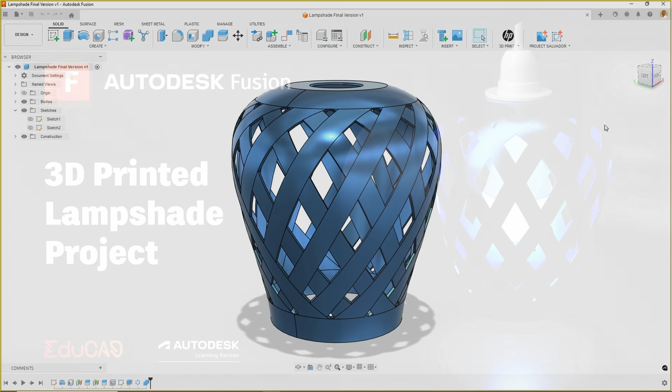Welcome to this video where we're going to use Fusion to create a lampshade that can be 3D printed. I'm Steve Cox, an Autodesk certified instructor, and today we're going to go through building this lampshade model in a way that is robust and resilient to being modified in multiple ways.

You can then use that initial design created in this video in a way that enables design exploration and allows you to use Fusion together with your own creativity to produce your own bespoke 3D printed lampshade.

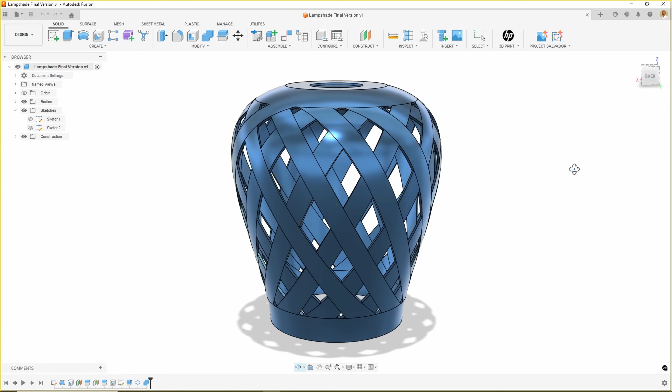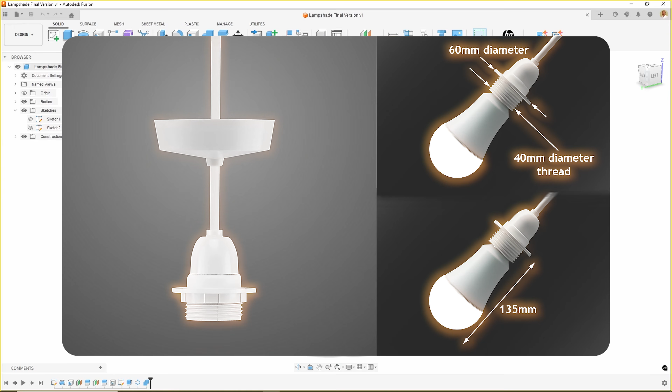Firstly though, I need to understand the light bulb and ceiling pendant that will be used together with this lampshade. I found this combination at a hardware store, and these are the dimensions that I will need to consider in designing the lampshade. But you can make your design match whatever parts you have available to you.

When you start a new design in Fusion and you encounter this intent-driven design panel, you're being asked to choose what kind of design you're about to create. Since the lampshade I'm designing will be a standalone model, I could select the part design option here. However, because I'm going to be doing some exploration with this design, I'm going to use the hybrid design approach, which gives me a more free-flowing and unstructured workflow.

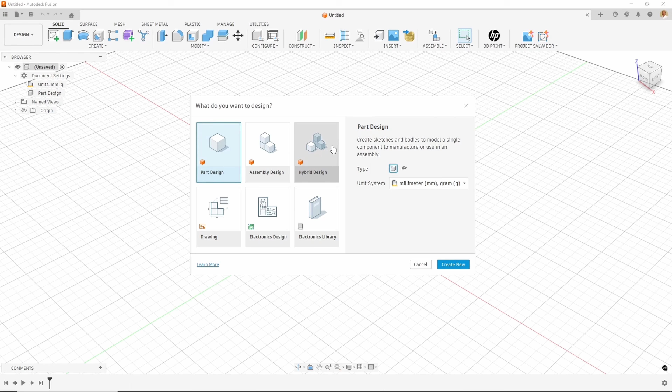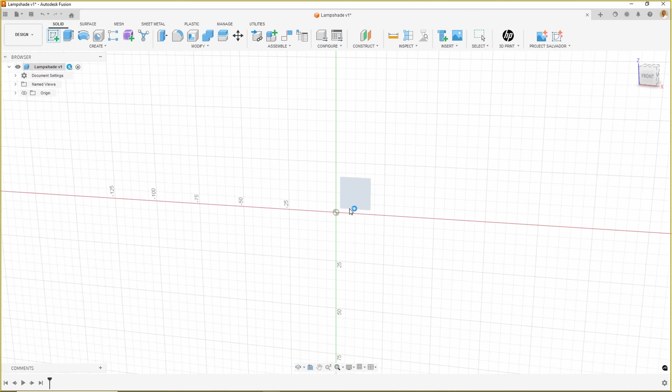If I later choose to insert other components to reference in my lampshade model as part of that design exploration, the hybrid design option will give me more flexibility to be able to do that. So let's start designing our lampshade for 3D printing. The first thing I'm going to do is to create a sketch on one of the vertical planes and draw a center line for the revolved shape that will create the basis for the lampshade.

So we'll put in a vertical line like this, which I'm then going to dimension using the sketch dimension tool. I'm going to make that vertical dimension 185 millimeters because that overall height will be good to accommodate the pendant and light bulb fitting combination that I'm going to use with this design.

Now, before I go any further, I want to change that line type from a standard line to a center line. To do that, I can pick the line, go across to the sketch palette and pick the center line option. You'll see that the appearance of the line changes to a chained line. A center line will still create an enclosed sketch profile, but it will give us a couple of advantages that you'll see as we progress.

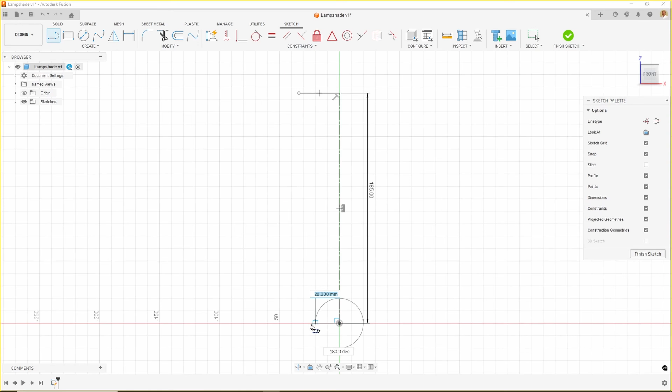I'm now going to continue my sketch by adding a horizontal line at the top of my center line, which will create the top face of my lampshade, and then another horizontal line at the bottom of the center line to create the bottom face of the lampshade.

Now, one of the first advantages of creating that center line is that when I add a dimension, if I click on the line and then go out to the outer point of the line at the top, you'll notice that it gives me a diameter dimension rather than a radius. And that's perfect for what I want because I know the diameter of the fitting that needs to go onto the top of the lampshade. So I'm going to make that 80 millimeters. So that's now dimensioned as a diameter rather than a radius.

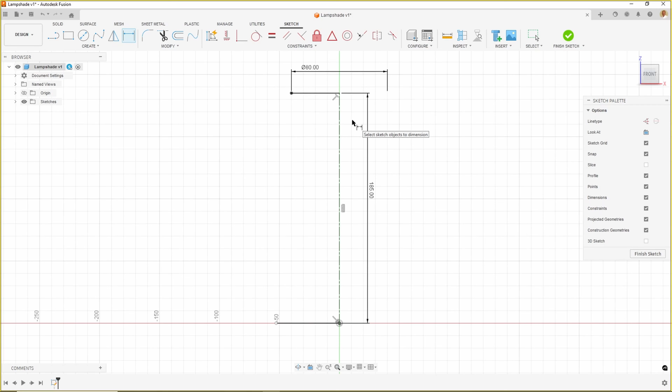And I'm going to do the same thing down here for the bottom line. I'm going to click on the center line again and the outermost point of the bottom line and make that 110 millimeters because I want to create a lampshade that will be wide enough at the bottom to get my hand inside to fit or change the light bulb.

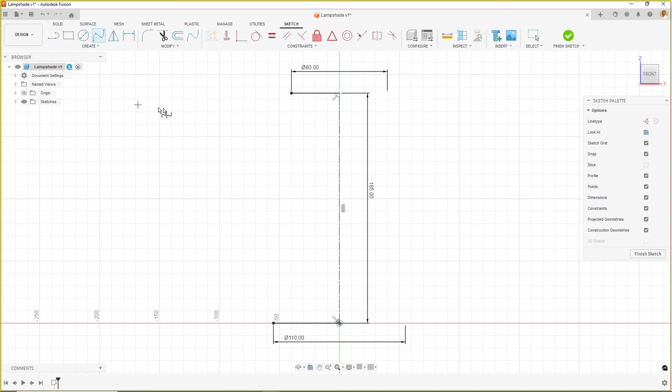Now I need to define the outer shape of my lampshade, and to do that I'm going to use the Fit Point Spline tool, which you can find in the Create menu just about halfway down. I'm going to create a fit point spline with just 2 points that connect the ends of the top and bottom horizontal lines. Now at the moment this just looks like a straight line, but if I now press Escape and come out of the spline tool, these green tangency handles mean that I can actually adjust the spline and it can become something other than a straight line.

Now, I always say that less is more when it comes to splines. The fewer spline points that you've got, the more pure the curve that it creates, and the purest curve will always come from just 2 fit points like this. Though even with just 2 points, you can still see the large amount of adjustment that you have available for the curve.

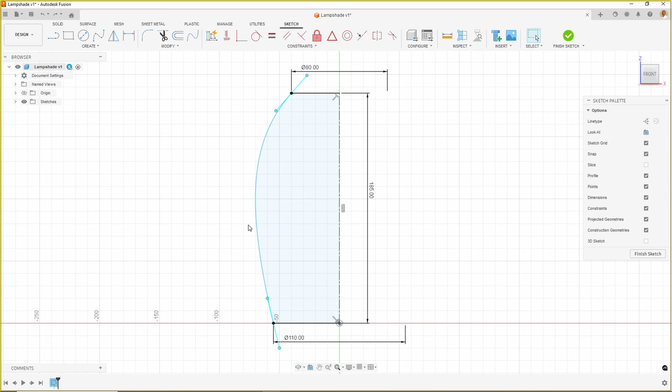Whilst less is generally more, one of the things that you can always do is to right click on the spline and use this option here called Insert Spline Fit Point, which will allow you to add another fit point onto the spline if necessary. I'm going to leave it like this with just 2 spline points to give me the basic outline for the lampshade. I'm now going to finish the sketch and come back out into the 3D mode.

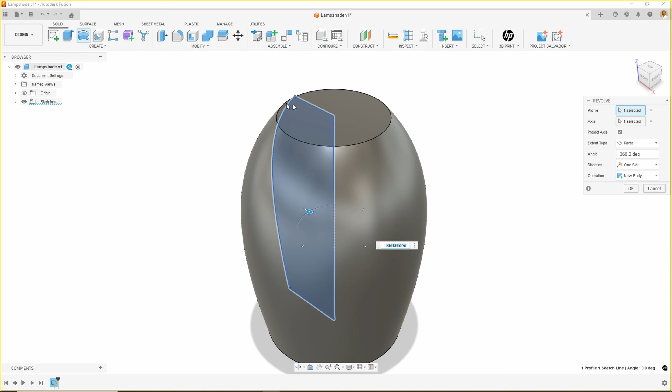What I want to do next is to revolve this profile to create a 3D body. So I'm going to use the Revolve tool, and what you'll notice here is the moment that I select that tool, it's actually found the profile and detected the center line as the axis of revolution automatically. So that's a second efficiency benefit of defining the central vertical line in our sketch as a centre line rather than a regular line. I'm now going to click on OK, and I now have the basic shape for my lampshade.

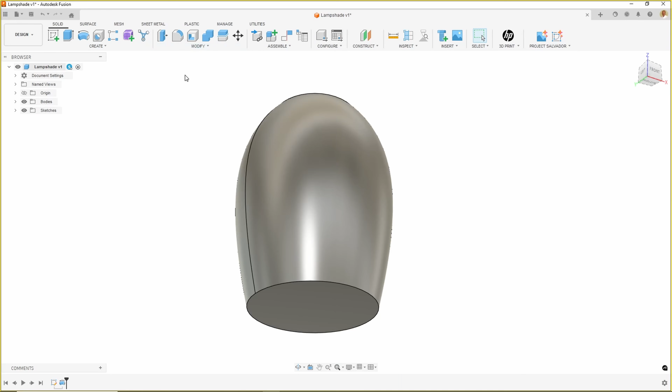This is a fully solid body at the moment, so the next thing I want to do is to hollow the shape out. To do that, I'm going to use the shell command from the Modify menu. If I choose this bottom face, it will actually remove that face and then set a uniform thickness to the rest of the body.

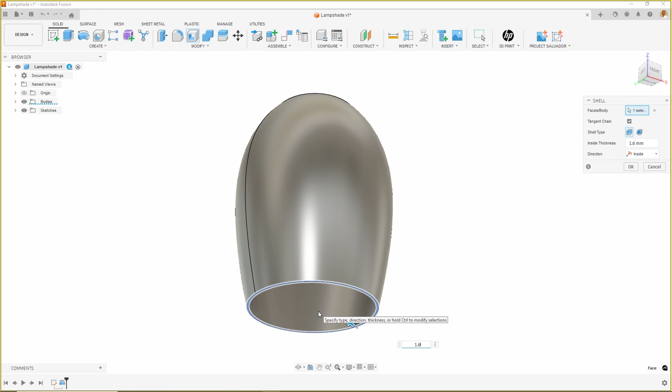As I said at the beginning, this is going to be a lampshade that we're going to 3D print. So in order to make that 3D printing really efficient, I want to make this thickness dimension a multiple of the nozzle diameter I'm going to use to make this particular lampshade. Now for me, that is a 0.4mm nozzle, so I'm going to make this shell thickness 1.6mm. So you can see that it's now shelled out the shape to a uniform 1.6mm thick and opened up the face at the bottom to allow access to the bulb.

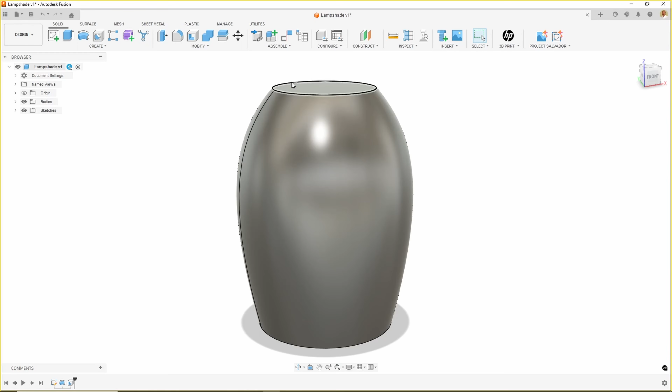With this basic shape, I now want to think about giving this lampshade an interesting pattern. But it's a pattern that I only want in the centre of the shade. The first step to achieve that is to cut this single body into 3 separate sections. For that, I'm going to use the offset plane command and firstly create a plane that is minus 15mm from the top surface of the lampshade.

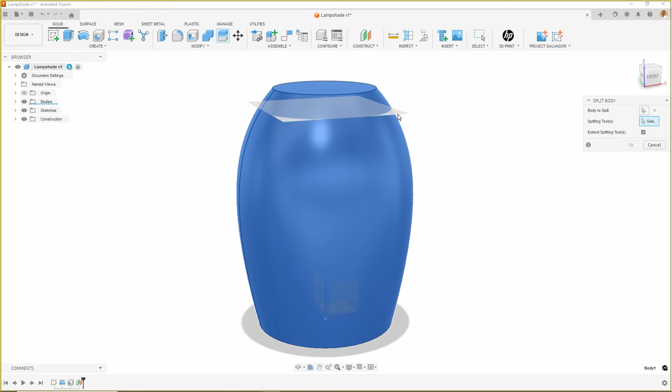Once that's created, I'm going to use the split body option from the Modify menu. I'll select my main lampshade body as the body to split, and then choose the plane that I've just created as the splitting tool. What you see is a red disc appear on the screen, and in Fusion, whenever you see red appear on the screen when using a particular command, you know there's a cutting operation going on. So that plane has now been used to cut this body into 2 parts that you can see in the browser.

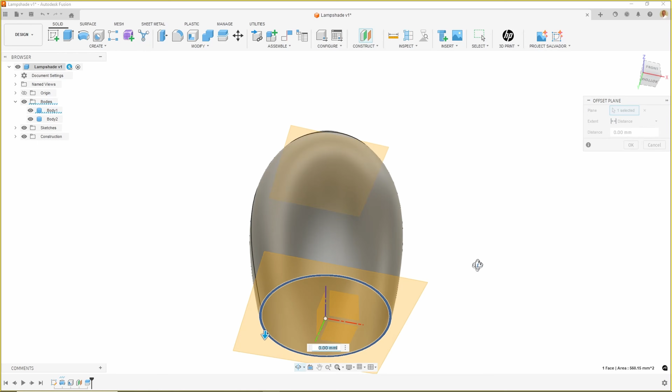I'm now going to repeat that with another offset plane, this time 20mm up from the bottom face of the lampshade. I'll then use that plane with the split body command to split off the bottom part of the lampshade. You'll see the red disc appear again, and you can see in the browser that I've now got 3 separate bodies. And at this point I can turn off the visibility in the browser of those 2 planes that I created.

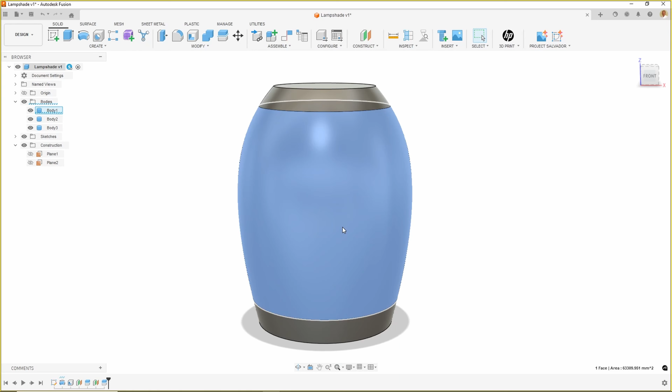My main centre section is now called Body 1, and that's where I'm going to create my pattern. And I've got a separate top part of the body called Body 2 and a separate bottom part called Body 3. Before I produce my patterning, I want to create the hole in the top part of the model for the light bulb fitting to be attached. So I'm firstly going to turn off Body 1 and then use the Hole command, which is found midway down the Create menu.

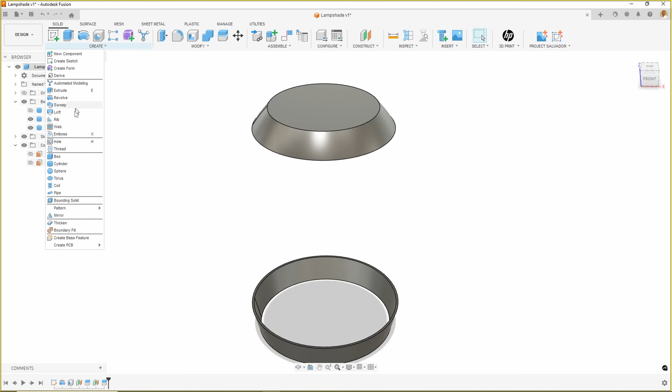Once I select the Hole command, I can choose the top surface of Body 2 that the hole will begin from, and you will see it will create a hole. And you can use this white point that you see to snap to the hole centre as I bring it close to it. That white point represents the very centre of that top face, and that's exactly where I want this hole to be located.

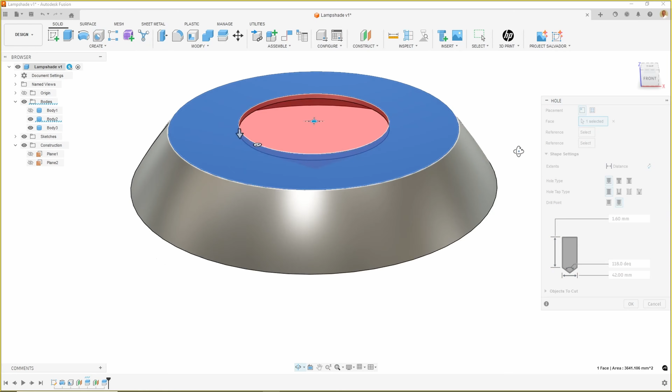Currently this hole is specified as 40mm, but that's the size of the thread for the fitting, and I do want to provide a little bit of clearance to that, so I'm going to change that hole size to 42mm. Now, one last thing in order to make this a very robust model is to change the extent from distance to the To option. And in this case, the hole needs to go fully through to the underside of Body 2. So I'm going to select that face.

That will ensure that this hole will always cut through fully to that face, even if I decide later to change the thickness of this lampshade. This is an example of building in relationships between features into a model that brings more robustness into it when you decide to use it for design exploration or later modification.

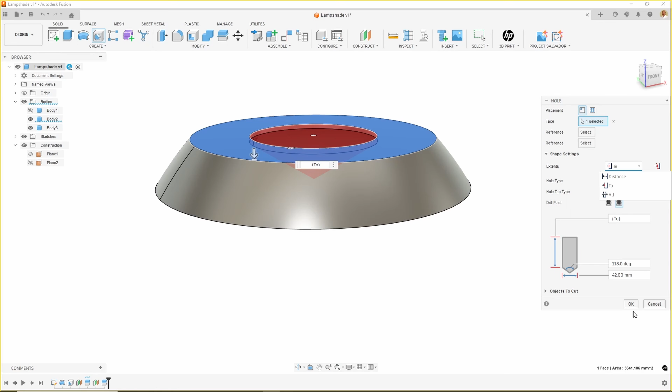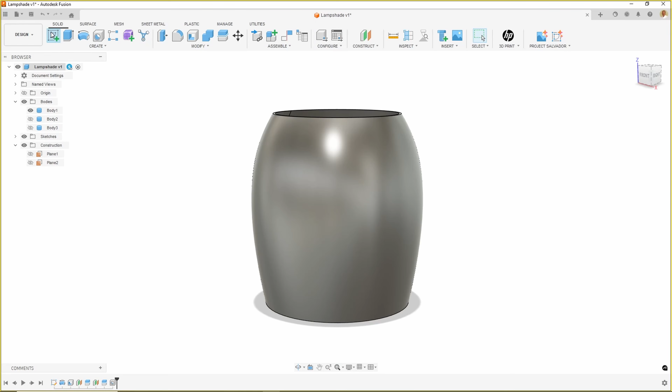The top piece of the lampshade is now complete, so I'm now ready to do the patterning in the centre section of the lampshade. I'm going to bring Body 1 back into the workspace and turn off Body 2 and Body 3 so I can concentrate on this centre section for the patterning work. I'm going to create a new sketch again on one of the vertical origin planes, and the first thing I need to do in this sketch is to bring in the overall shape of the body. And to do that, I'm going to use the Project option from the Create menu.

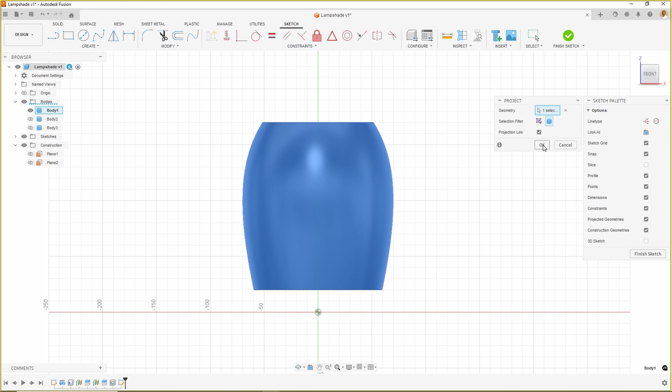With the Project tool open, I need to select the Body option before clicking on Body 1. That will then bring in a reference outline of the body that you can see here when I turn off the body in the browser. This reference sketch geometry will allow me to bring in the elements that I want to use to create my pattern. For that, I'm just going to create 2 diagonal lines.

In this case, they're going to be diagonal and connected from the top line of the reference sketch to the bottom. At the moment, these 2 lines aren't parallel, so I'm going to use the parallel constraint from the Constraints menu to ensure that's the case. In this case, the first line I pick will stay where it is, and the parallel constraint will move the second line to be parallel to it.

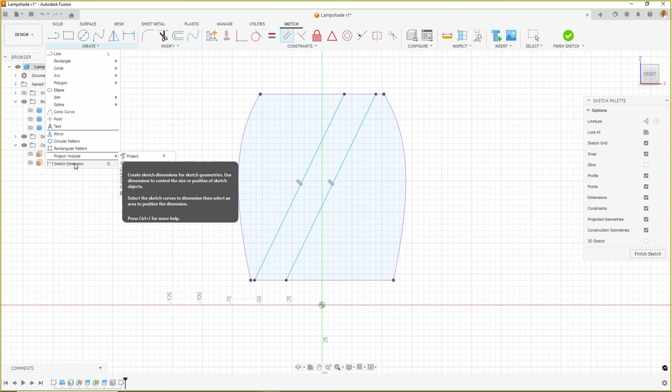Now they're parallel, I'm going to introduce a dimension between the two, which I want to be 15 millimeters. So that's given me a 15 millimeter wide parallel profile strip that I can use for my patterning. I'll turn Body 1 back on now and finish my sketch. I'm then going to use the Extrude command, pick on that profile and extrude it. And in doing that, I'm going to set the extrude direction to symmetrical.

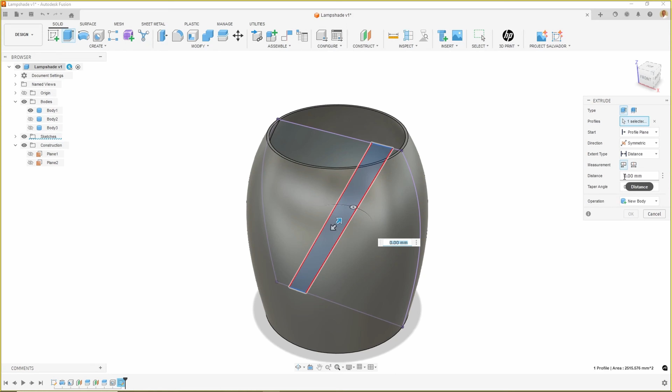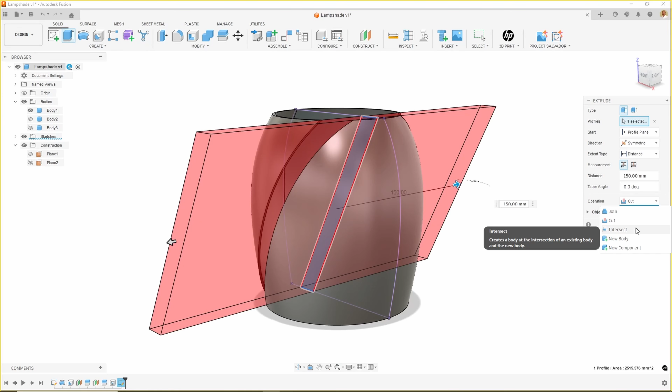And as I pull on the arrows, you'll see that it will create a cutting operation when I go beyond the outer wall of the body. Now you may be familiar with the join and cut operations when using the extrude command, but in this case we're going to use the third option, which isn't used that often, and that's called intersect. Intersect in this case will create two bodies formed from what is common between the existing body and the profile cutting through it, which is actually easier to demonstrate than it is to explain.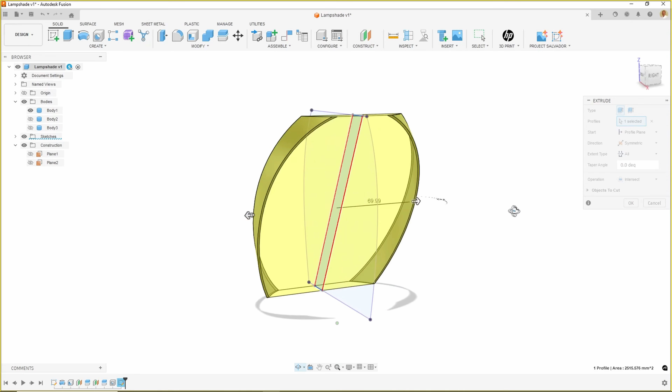One final thing before I finish this is to change the extent type again, from distance, which is currently going way beyond the outside of the model, to All in this case. That will now make sure it will always cut through to the outer surface of the lampshade, no matter what changes I may make to the overall shape when I go through the design exploration phase with this model. So I've now got these two strips, so let's bring the other bodies back in. I'm going to use these two strips and then use the Pattern command from the Create menu to create my lattice feature.

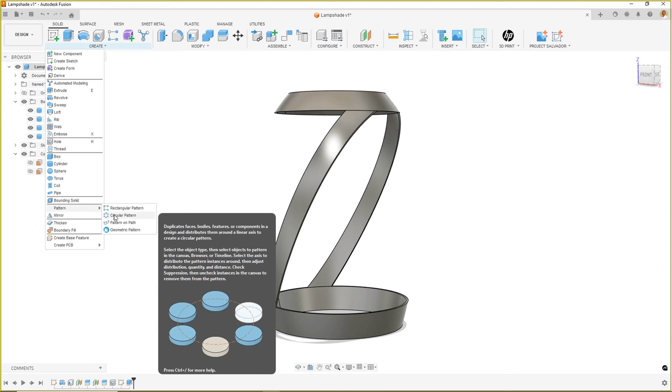In this case, it's going to be a circular pattern that I want, and I'm going to click on the two strips and then the vertical origin axis as the axis of revolution. I can now adjust the number of repetitions from the default of 3 to create this lattice type of pattern, and in this case I think 10 repeats looks about right.

And that's my basic lampshade model completed, with quite a short but robust and resilient timeline. There's one more thing to do though before it's ready for export in a 3D printing format. But before I do that, I want to show you how you can now explore, modify and create many different versions of this lampshade, and perhaps experiment a little yourself before finally deciding on which version you want to print.

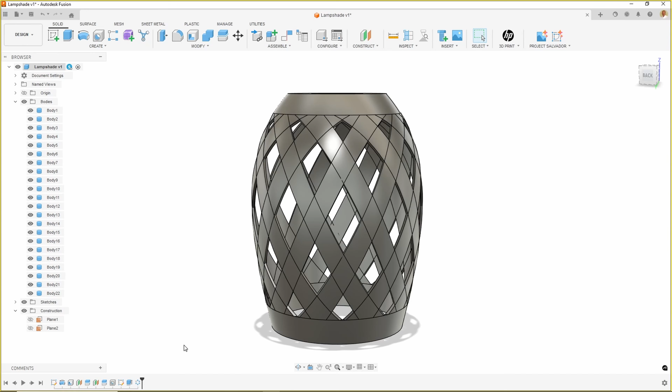For instance, I can right click on the very first sketch in the timeline, go to Edit Sketch, and using the spline tangency handles I can adjust the outer profile of the lampshade to make the overall shape different to the one that I started with. When I finish this modified sketch, because of the way that this model has been built, with the correct parameters and interdependencies, it will successfully rebuild a lampshade.

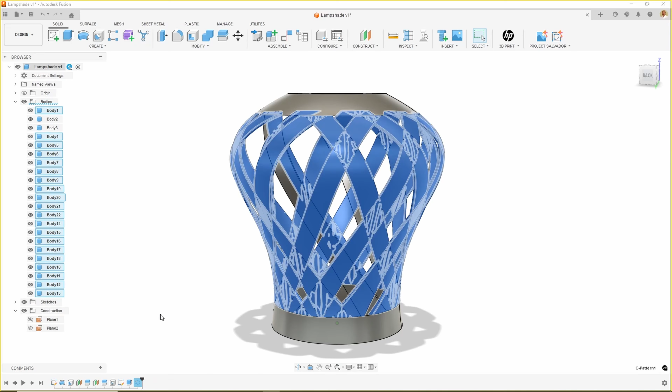You might then want to edit the circular pattern, and perhaps in this case increase the number of pattern elements to suit the new overall shape by editing the pattern command from the timeline. You could also right click and edit the sketch that created the lattice into something else, maybe using a curve line or more complex straight line strip patterns, for instance, which will give you a completely different type of lattice pattern.

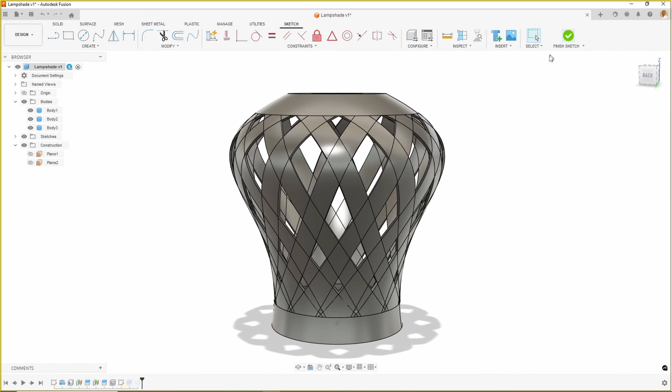You could also right click and edit the position of the cut planes that we created to adjust the top and bottom portions to either increase or decrease the latticed area. So you can see that this is a resilient model that we've built, which gives you lots of options for modifying it to create many different types of lampshade.

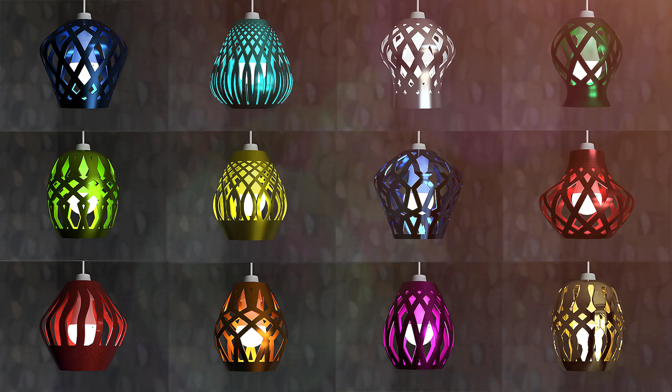The image on screen now shows some of the different designs of lampshade that have all been generated from this very same model using the things that I've just mentioned. And hopefully this gives you an idea of the range of modifications and different designs of lampshade that you might be able to create.

So as I mentioned earlier, there's one final thing to do when you've completed your design exploration phase and you have a design that's ready for 3D printing. We need to bring all of the multiple bodies that we currently have in this design into a single body that I can export in a format for 3D printing. To do that, under the Modify menu, I'm going to use the Combine command.

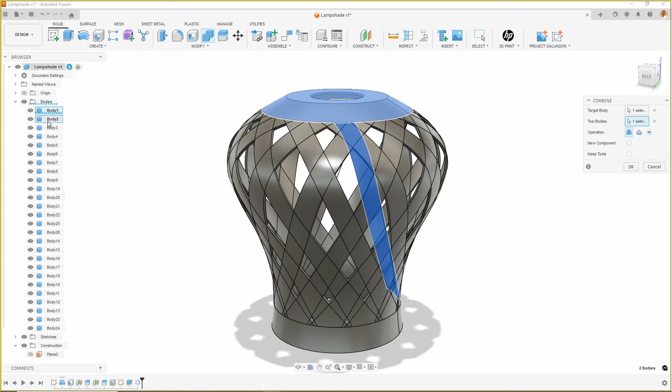I'll choose the first model in the browser as the target body, and then for the tool bodies I'll select the second body down in the list, hold down Shift on the keyboard and then pick the final body to select all of the bodies in between. I can then select OK and see all those bodies be combined into a single body in the browser. Now, depending on the complexity of your model and the power of the device that you're using Fusion on, this may take a few seconds to complete.

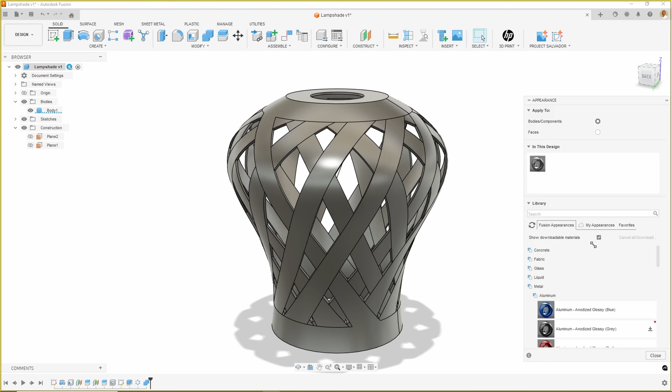Once you've got a single body, you can also change the appearance and further experiment with how your design might look in the colours that you've got available for 3D printing. Finally, right-clicking on that single body in the browser gives you the option to save as mesh, and then either choose to export it out in the file format of your choice for 3D printing, or choose the option to send it straight to your 3D printing software.